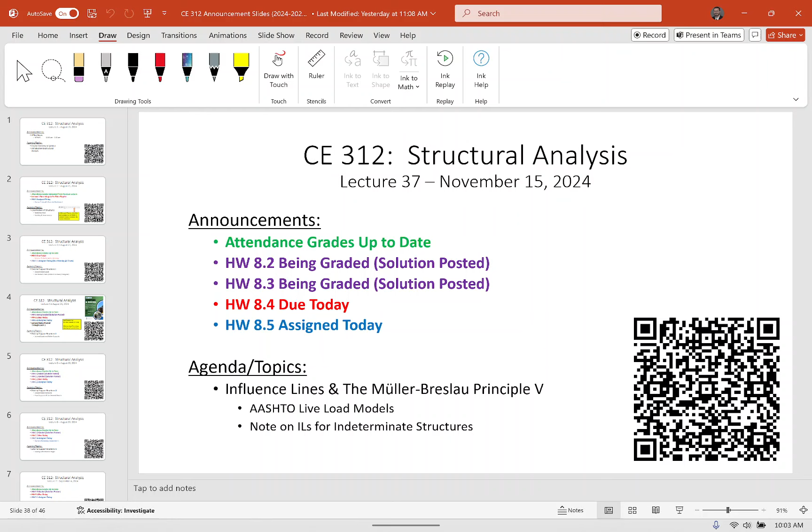Okay, so let's talk about our final lecture of influence lines, and what we're going to be talking about is AASHTO. How many of you have heard of that? I would imagine those of you who've had a transportation class have heard of AASHTO, the American Association of State Highway and Transportation Officials. I know I've got a couple mechanical engineers who probably are like, am I too mechanical to get that reference? So I'll explain. But let's just recap.

So we are still using the Mueller-Breslau principle to construct influence lines. And today, like last time, I am going to just give you the influence line. We are going to be doing a simply supported structure today, and so this is going to be our influence line. I haven't put any numbers on this, and I did that for a reason.

They give me so many of these rolling chairs. Get that out of the way.

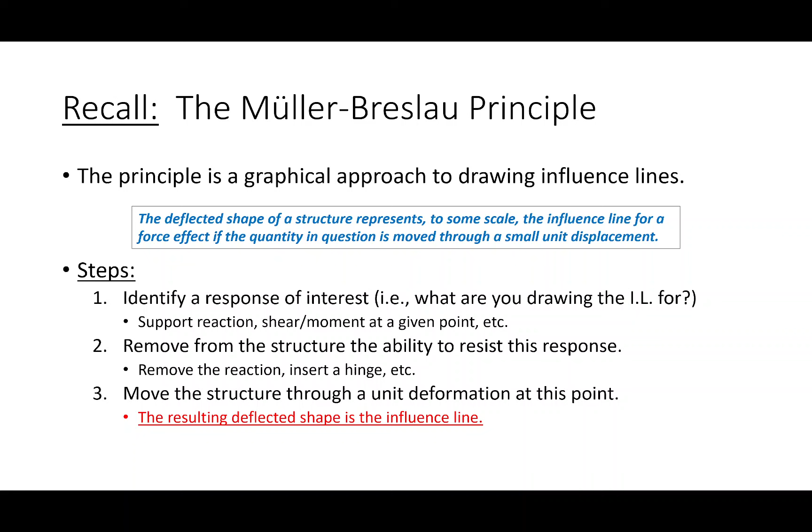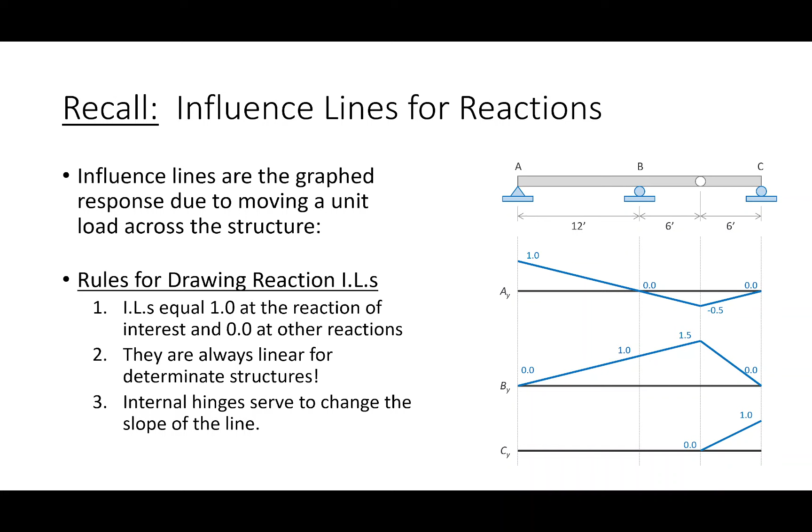Okay. So I didn't put any values on this influence line for a very specific reason, and you're going to see why in a bit. I do want to make sure that we're clear about the rules regarding influence lines. Influence lines are going to equal 1 at the support of interest. They're going to equal 0 at all other reactions. They're going to be linear for statically determinate structures. And for internal shears and moments, the big thing I want to get across is that influence lines are going to be 0 at the supports.

So the problem we're going to do today is an influence line for a bridge, and we're going to say it's a simply supported bridge, 80 foot long. Ultimately we're going to try to record a series of responses at points of interest, and the goal is to develop a big old table of these responses. I have here on the board a table that we're going to generate for the shears, and then we could generate a similar one for the moments.

Remember how I said we would do this at every tenth point, right? So if we had a bridge that was 80 foot long, we would generate a series of responses at x equals 0, and then x equals, there it is. We would generate a series of responses at x equals 0, and then we would do x equals 8.

x equals 16, all the way to 80. Now, if we're talking about internal moment, we're going to have essentially zeros right here and zeros right here. For shears, what we would have are the reactions.

What we're going to do today is we're going to pick a particular point on this table. So we're going to pick 37.5. And so we're going to generate a value here, a value here, a value here, etc. across the table. And we're only going to do it at one point, and then you're going to see what the answer would look like if you did it at every point. And that's where software and whatnot comes into play. But we'll get to that here in a bit.

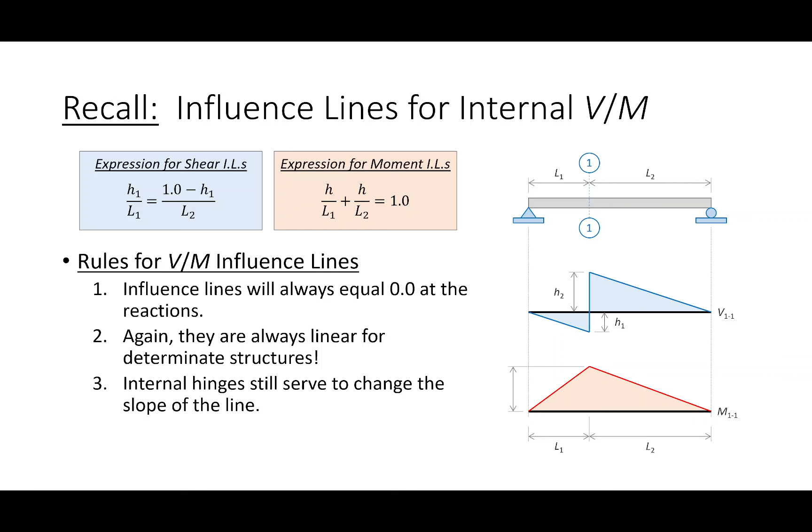Okay, let's talk about bridges. It is obvious that we need to design bridges for vehicular loads. They have to be strong enough to support the loads that they're going to be subjected to. But we don't design bridges for Honda Civics, okay? I'm being facetious when I say this, but really if you're a bridge engineer designing a bridge, the phrase I like to use is the cars are free. In other words, the cars do not produce appreciable load response on a highway bridge. It's the trucks that we need to worry about.

And really the term that I want to use is what are called exclusion vehicles, okay? Exclusion vehicles are your statistically upper bound loadings that you would need to consider. So things like concrete mixers, short haul vehicles, things like that. Now, we as engineers could not by any means design a bridge for every single truck that ever would cross a highway bridge in the United States. We can't do that, okay?

So what do we do? Well, by we I mean the engineering community. What we in the engineering community do is we collect data across highway bridges in the United States. If you ever hear the term weigh-in motion study, this is what I'm talking about, where we collect the weights that bridges are experiencing. And what we do is we develop a load model. And that load model represents, as best as we can, whenever you make the model simple, you sacrifice some accuracy, so there's a trade-off.

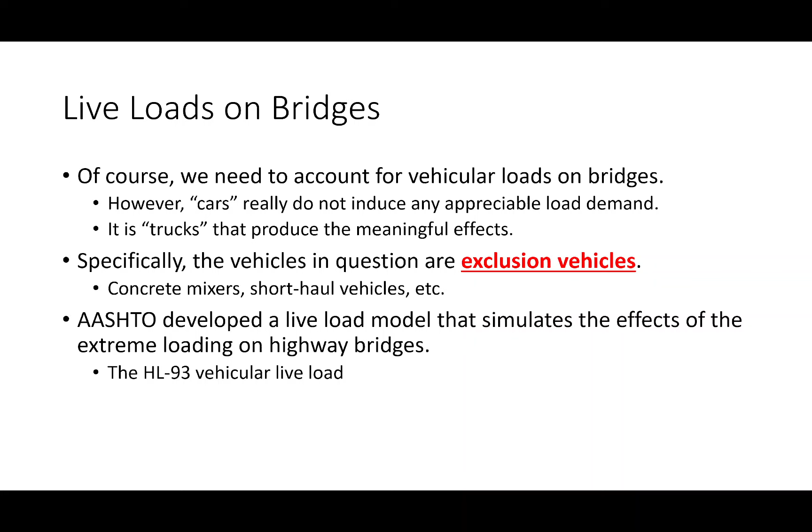So the load model that we use consists of three components. It consists of a design truck, a design tandem, and a design lane load. So let me take each of these one at a time. The design truck is what we see here. It consists of three axles. The front axle weighs 8 kips. So if I were to draw this as point loads, I would have an 8 kip load, a 32 kip load, and then a 32 kip load right here. So this axle weighs 8 kips. These two axles weigh 32 kips.

Okay, so let's make sure we're paying attention. Let's take the front axle. If the front axle weighs 8 kips, how much force is each wheel putting down on the front axle? 4 kips, right? 4 kips here, 4 kips here. And the wheels are spaced 6 feet apart. So if you wanted a 3D view of the truck, it would be 4, 4, and then 16, 16, and then 16, 16. And so the truck would look like that, if that makes any sense.

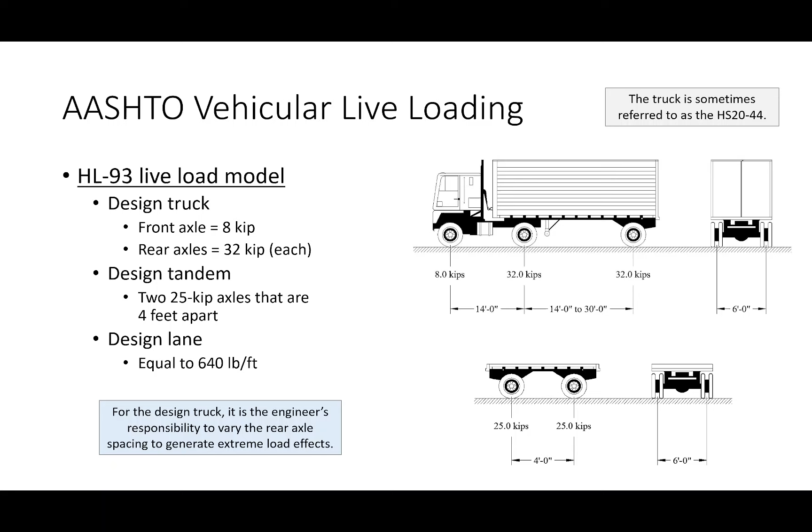So what you would need to do as an engineer is deal with all three of them. You would need to get a series of responses for the lane, a series of responses for the tandem, and then a series of responses for the truck. You would then combine them with these statistically calibrated load combinations and use that combined load, and that's what you would design with. That part is really easy. If you have this data and this data and this data, combining them takes about 5 seconds. The hard part is getting the data. And so that's what I want to go through today. Does that make sense? Okay.

Now, what we're going to do is apply the AASHTO load models to a bridge that's 80 foot long, and I want to get the data. I said 37.5. I'm sorry, I didn't mean 37.5. I meant 30. I know why I said 37.5, and you'll see why. But we're going to do this envelope, and I want to get the data in this row for x equals 30 feet. I said 37.5 because I was using that number there, so bear with me.

All right, so one of the things that's worth mentioning is I've already given you the influence lines. I think for a problem like this, constructing the influence lines is pretty easy. I hope everybody's okay with that. So I'm giving you the influence lines, and I want to figure out the worst case shears and moments due to my three loads. Worst case positive and negative shear for each, and then positive and negative moment for each, at 30 feet. And again, that would just be one row in the table, and then we would do this over and over again.

Let's see. Okay, so let's see what we can see. Where did my pen go? Where did my little pen? Oh, there it is. Okay. So

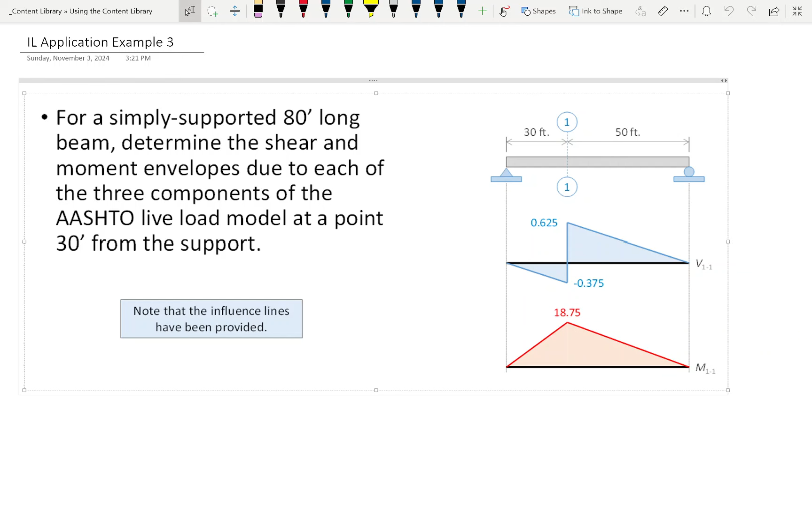I'm actually going to do this in the backwards order that I described it. I described the truck, the tandem, and the lane. What I'm going to do is do it in the order of the lane, the tandem, and the truck, because I think it gets harder as you go. So just bear with me. Let's see what we can figure out. Okay. I am going to cheat a little bit here. Bear with me. I'm going to cheat a little bit.

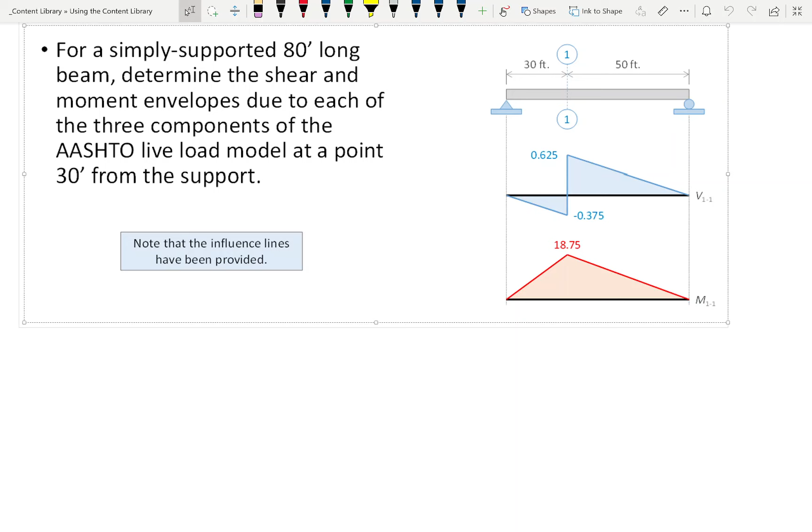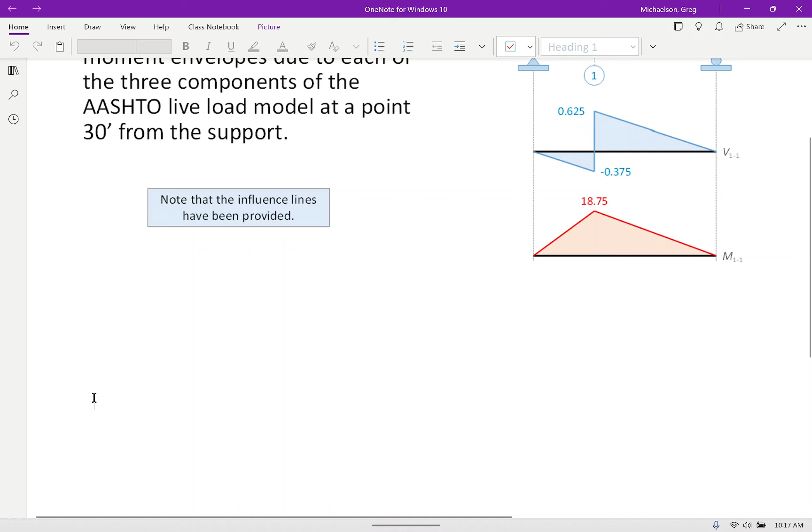Are you kidding me? Why does this always happen? Let's try something here. If this doesn't work, I'm going to get upset. Okay, for some reason, OneNote likes that, but it doesn't like the other one.

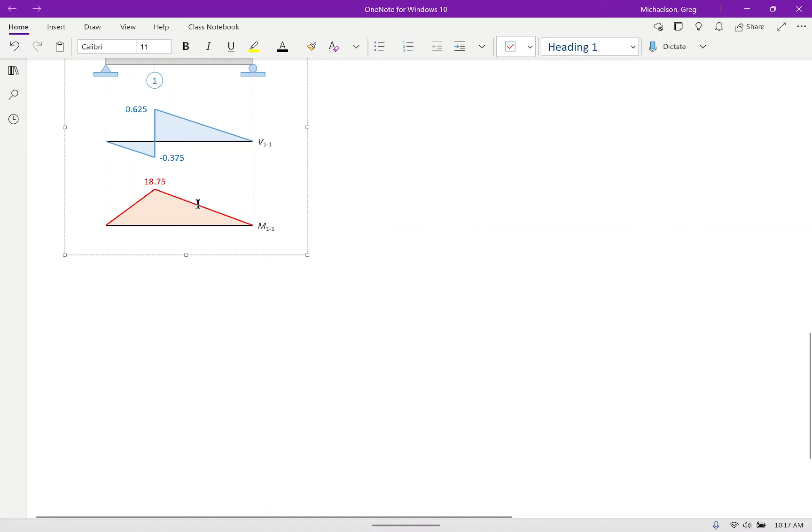Okay, so if you notice what I'm doing, I'm kind of being a little lazy here, and I'm pasting these images over and over again, mainly because I don't want to have to scroll up and down again. If you're writing this in your notebook, it shouldn't be that big of a deal.

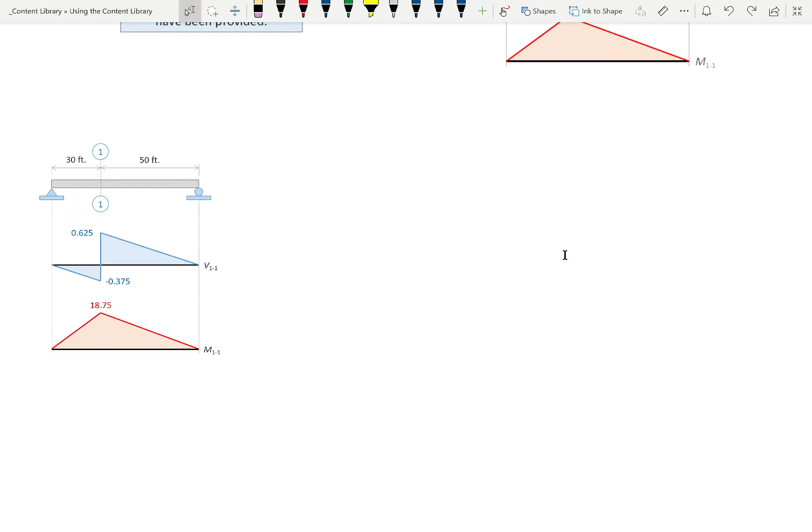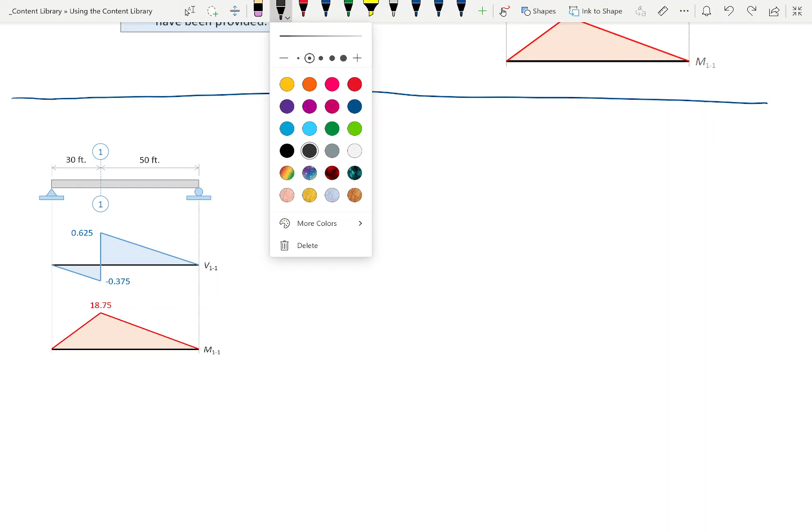Okay, so what we're going to do is we're going to handle each load one at a time. Let's start off with our lane load. The lane load is admittedly the easiest one to deal with. So our design lane is 640 pounds per foot. And so we're going to place that lane load wherever we need to generate worst case response. So we've done this before.

If we were looking at shear, where would we place the load to generate worst case positive shear? We'd place it from here to here, right? What about negative shear? Here to here, right? What about worst case positive moment? Everywhere. What about worst case negative moment? Nowhere, right? There is nowhere that you can place the lane load to make the beam frown at you. Make sense? I just want you to keep that in the back of your head.

Now, a couple things worth mentioning. I'm going to do some intermediate calculations for you because I don't want this to be an exercise in geometry. Would you believe me if I told you that that area is 15.625? And that this area is negative 5.625? Would you also believe me if I told you that that area is 750? We have 18.75 times 80 over 2, so 18.75 times 40, right? Does everybody believe me there?

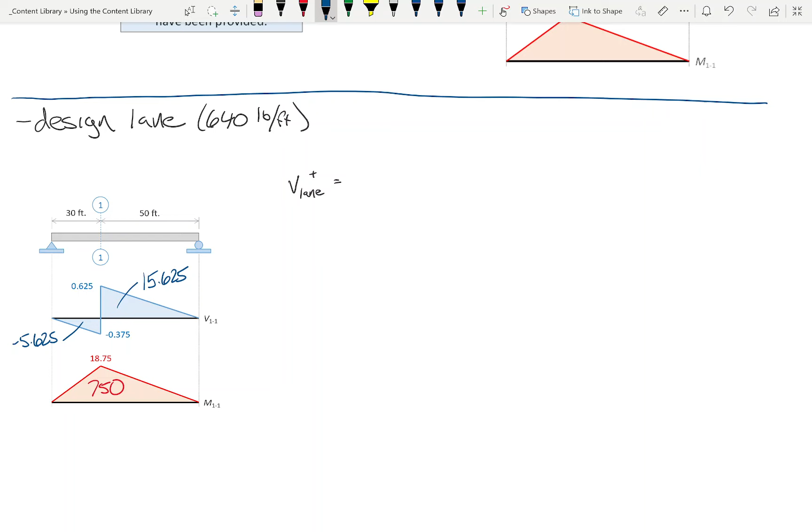Okay, so for the worst case positive lane load, first off, note that 640 pounds per foot is 0.64 kips per foot. So 0.64 kips per foot times 15.625 feet, and it's actually pretty even. It's 10 kips, and then V lane minus is 0.64 kips per foot times negative 5.625 feet, and that ends up being minus 36 kips.

So under the lane load, this point on the beam would see a range of shear anywhere between 10 kips and negative 36 kips. Wait, did I get that backwards? 3.6. Sorry. 3.6. That was a very understandable questioning look from the class. Hold on, Dr. Mike. There's this thing called arithmetic. That's a fair point.

So similarly for the lane load, for the moment, we're going to have a positive, 0.64 times 750. And again, for you units folks, that's 750 square feet. That's 480. And then what did we say the negative is going to be? 0.

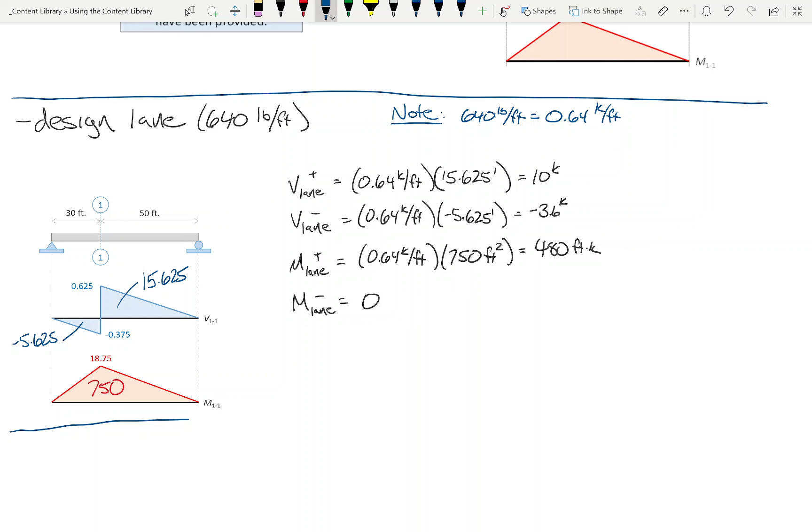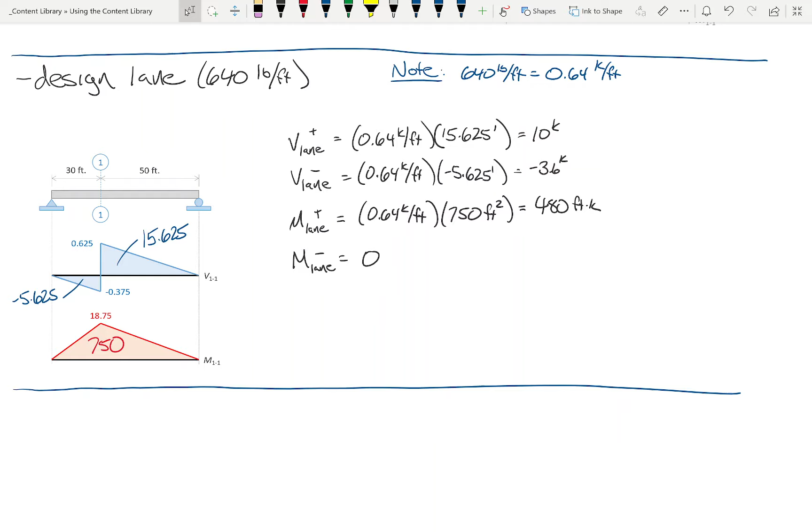So what I have here on the board is just for shears. I would say that this value here is positive 10, this is negative 3.6. You're probably not seeing where this is going, but give me a little bit of rope on this one. You'll see where this is going in a bit. Is everybody okay with this? No questions. Then I'm going to start ratcheting it up a little bit with the design tandem.

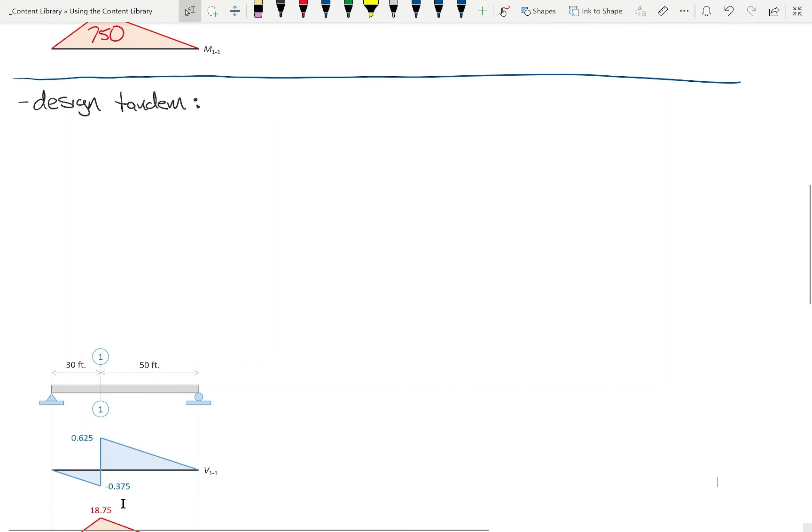So let me bring this up here. Now, remember, what does the design tandem look like? Here's the ground.

That's what the design tandem looks like, right? Okay. So let me see if I can paint the picture. I have a design tandem. So I want you to imagine that I have two loads that are 25 kips each, right? The distance between them is fixed at 4 feet apart. So let's look at my little diagram here on the board.

I need to figure out where to put these loads on the bridge in order to generate the worst case response. So let's start with positive shear. So we agree that this is going to be my positive area. This is going to be my negative area, right? So is everybody in agreement that if I want to generate worst case positive shear, I don't take those loads and stick them here, right? Everybody okay with that?

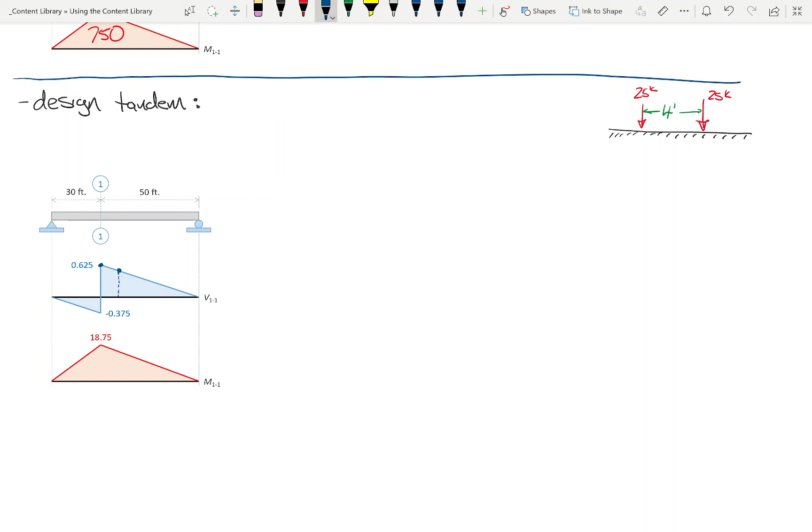So I know this value here is 0.625. I need to figure out this value right here. We'll call it H1. So how do we do that? 0.625 is to 50 as H1 is to what? 46. Because if that is 4 feet, and that is the tiniest number I think I've drawn this entire semester, but if that's 4 feet, that makes this 46, right? Does that make sense?

So, therefore, this implies that, here, I'll lower this down just a bit. And what is that? 0.575. Is that okay? All right. Now we're not talking about negative shear right now, but can anybody... So we did this one. We did this interpolation right here.

We're not talking about negative shear right now, but can anybody peer through the crystal ball and see another interpolation we're going to have to do? We're going to have to do this one, right? So why don't we go ahead and recognize that we're going to need to do negative 0.375 is to 30 as H2 is to what? If this is H2, 26.

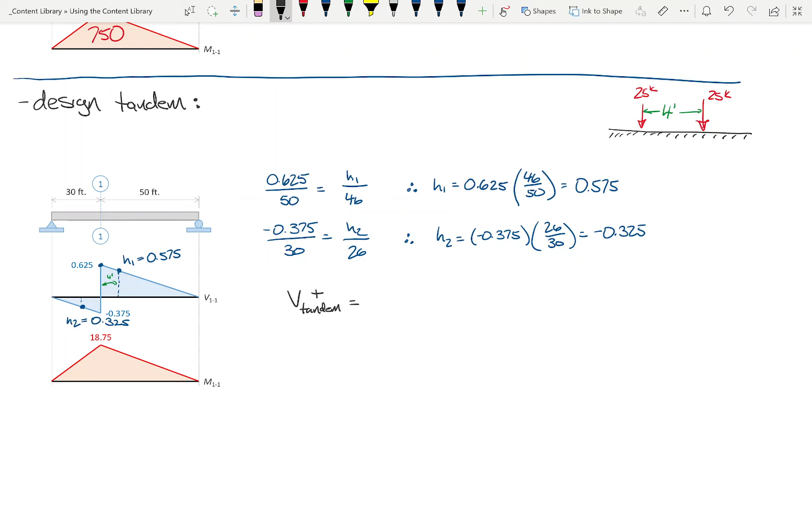4 kips times 0.625. 4 kips? Oh, 25 kips. All right, so 25 times this plus 25 times that, right? Does that make sense? So this is going to be... does that make sense? And what is that going to be? 30.

I picked a spacing where I wanted the numbers to be kind of easy to deal with. So V tandem negative, I'll go ahead and do this one for you. Would you agree with me if I said that? So we'll say that.

Sound good? Okay. Now, let's think a little bit about the moment. I did my best here on the board to try and draw this to scale. It's perfect on the screen. I have 25 kips. Where is one of those 25 kips going to go? Right here, right? Okay. Where's the other one going to go?

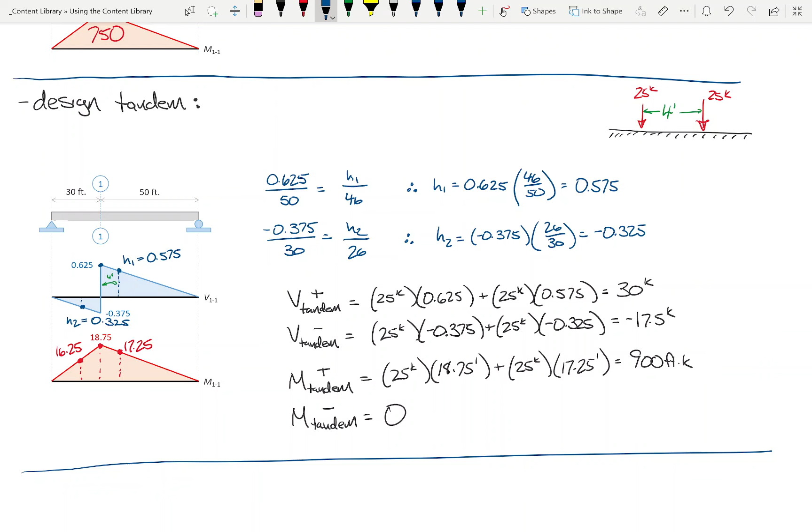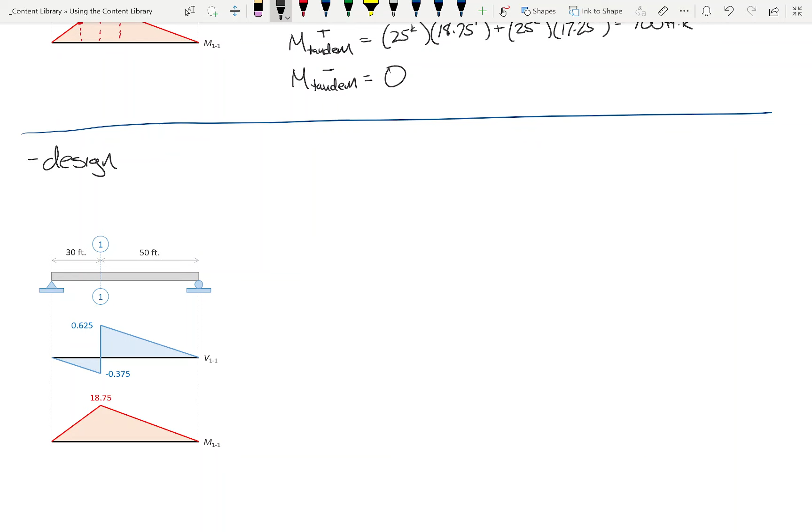All right, let's talk about the truck now. Okay? Let's talk about the truck. So the truck, see, now you can see why I cheated. Because I didn't want to have to scroll up and down. That would just be a nightmare. Okay. All right. So, again, what did we have? We said that the truck, 8 kips, 32 kips, 32 kips, 14 feet, and then we said 14 feet to 30 feet, right? That's the model.

Can I ask you a question about bridge design? Is there anything on that model that says the traffic's going this way? Well, that's how I drew it, but does it have to go that way? Like, what I'm getting at, is there anything that says the truck can't go the other way? Vehicles can drive either way on the road, right? The model doesn't care, okay? So what I'm saying is you can reverse the order. And you might be wondering, what's the point? What are you getting at? Okay. Do we agree 14 feet is the number that makes sense, not 30?

Okay. So here's what I'm going to do. On the shear diagram, let's do shear first. On the shear diagram, what I'm going to do is I'm going to interpolate 14 feet out, 14 feet out. And then over here, 14 feet out, 14 feet out. And I just realized I said shear diagram, not shear influence line. Bad. This is the influence line, not the shear diagram. Okay, so let's go 14 feet out either way.

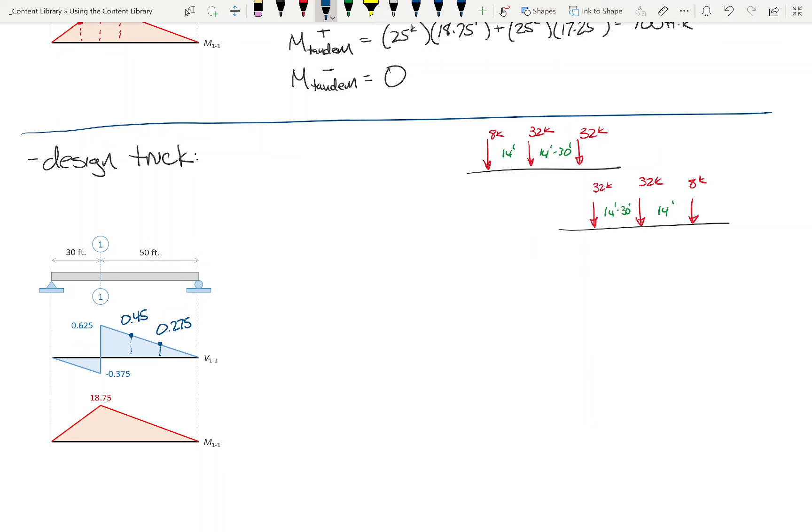Are you all comfortable if I just give you the values? So this is 0.45, 0.275. This over here, negative 0.2. And this, negative 0.025. And I can see a question coming up, which I'll address here in a bit. Well, I'll do it now. What happens if it goes off the bridge? Just ignore that axle, and you'll see what I mean here in a second. Okay.

All right, so let's do V truck positive. So we're going to have a load times 0.625 plus a load times 0.45 plus a load times 0.275. Okay. So what do I put here? Do I put 8, 32, and 32? No. I put 32, 32, and 8, right? I face the truck whichever way is going to generate the worst case response. And when you chug this out, you get 36.6 kips.

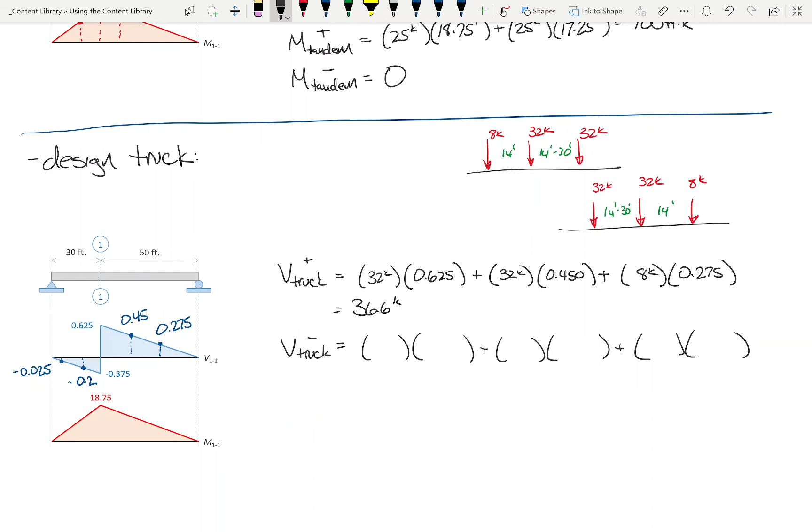For V truck negative, let's do the influence line indices first. So if I go, let's just say, from left to right. So bam, bam, bam. So negative 0.025, negative 0.2, negative 0.375. So what order do I place the loads? Is it 8, 32, 32? Yes, right? Because that's the worst case value. So 8, 32, 32. And so that is negative 18.6. So what would go in our final columns? It would be plus 36 and then minus 18.6.

Okay. Now, for moments, how do we do the moments? Like, how do we handle this? Here's how I do it: I don't try and be predictive. We agree 14's the distance, right? So let's just interpolate 14 foot on either end twice to see what values we should use, okay? Let's just go 14, 14, 14, 14. Is everybody kind of okay with that? So if you all are comfortable with this, this one ends up being 1.25. This is 10. This is 13.5. And this is 8.25.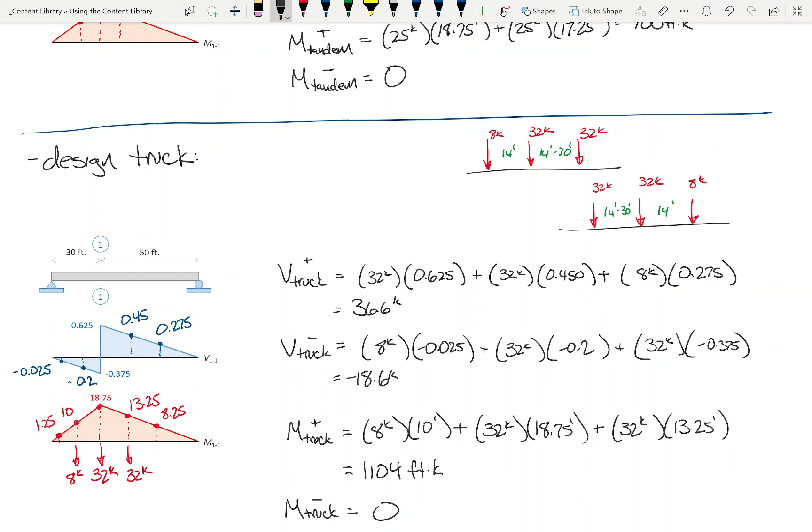Does that make sense? So this is the range of moments and the range of shears for which you would design. So if you want to know what the answer is, all these values. Okay? Does that make sense? Okay. Does everybody feel comfortable with this analysis?

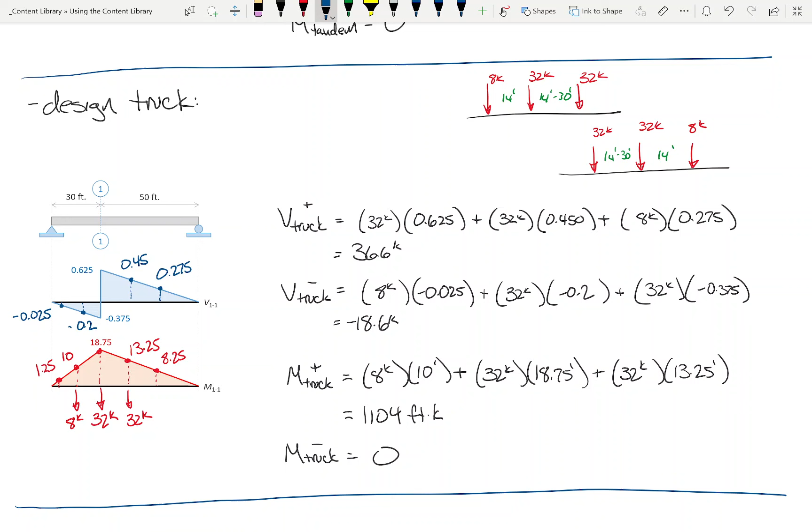So if you were to ask me what I call this process, sometimes I call it live load generation. That's kind of what I call it, is to generate the range of live loads for which we need to design. Make sense? All right, any questions? All right, I got a couple things I want to say, and then we'll call it. Okay. All right, so let me say a couple things.

So we did this at x equals 30 feet. Now, I picked an arbitrary point, and some of you are probably thinking, well, wait a minute, Dr. Mike. You said 10th points. 0, 8, 16, 24, 32. 30's not on that list, right? You're right. It's not. Okay, so let's talk about that. Engineers. So first off, would everybody agree that you're going to have to do this a lot?

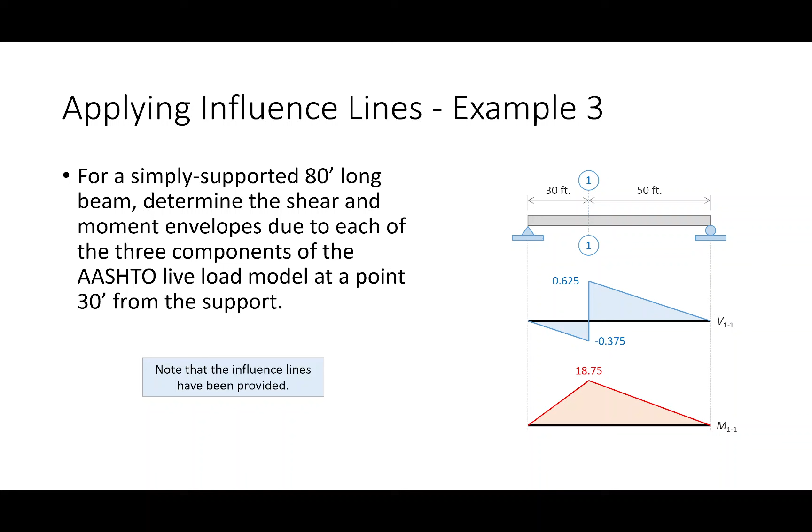So the first thing that's worth mentioning is that I didn't give you any values here because I think a valuable exercise is to figure out how to draw an influence line at some distance x away as opposed to 30 feet or 40 feet or 45 feet away. Do it at x away. And you can derive pretty simple formulas for this: this is negative x over L. This is 1 minus x over L. This point right here is going to be x times 1 minus x over L.

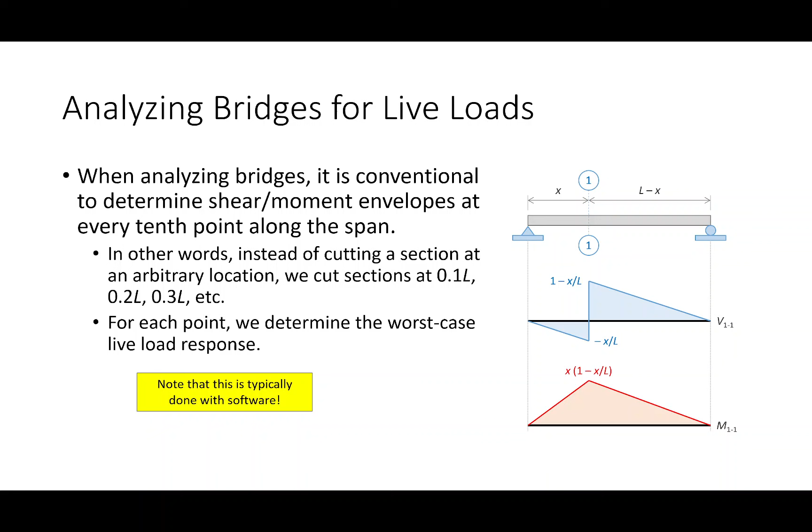So let me give you a motivating example. Let's say you needed to determine the shears and moments 30 foot away from the support, because right there you have a connection, a splice plate, or a cross frame, and you need to know the forces at that point to design and detail it, which is very common in bridge design. So one way of doing that problem is to do this. If you do this at 30 feet, these are the answers for shear. But couldn't you get close enough to these answers by just linearly interpolating?

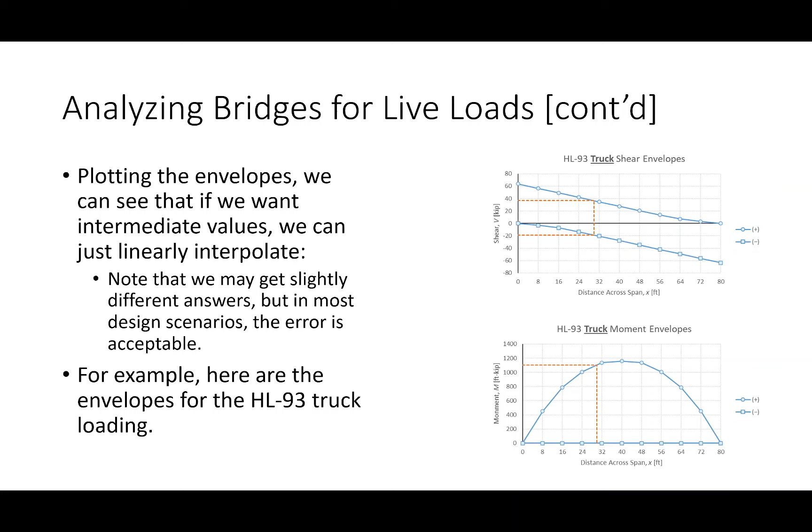Now I'm going to show you my next slide. I think it's the most dangerous slide I'm going to show you this whole semester, and I want to explain why. Everything that we have been doing has been influence lines for determinate structures. What if the structure is indeterminate? If the structure is indeterminate, the influence line can curve.

Because if I take, let's take the best example, the influence line for the reaction at B. So how do I draw the influence line? I take that structure and I kick out the roller support from B, and then I move point B through a unit displacement. But if I remove the support at B, that's a simply supported beam. So in order to pick point B up, I have to deform the structure, right? So it's gonna curve, okay?

But the reason why I say this is a really dangerous slide is this is only for structures that are indeterminate, okay? So if I give you an exam problem, for example, and it's a determinate structure, don't do that. Don't do that, okay? Does that make sense? I'll just level with you. I'm not giving you an indeterminate problem where you need to develop quantitative influence lines on the exam. I'm not doing it. So, no.

Now, in the real world, if you had a two-span bridge that was a continuous span, you're going to have some curved influence lines. That's where software comes into play. That's where MASTAN would do this or something like that. You would just develop a finite element model and then do it at every 10th point and record your responses. Most bridge engineering software programs will do that for you.

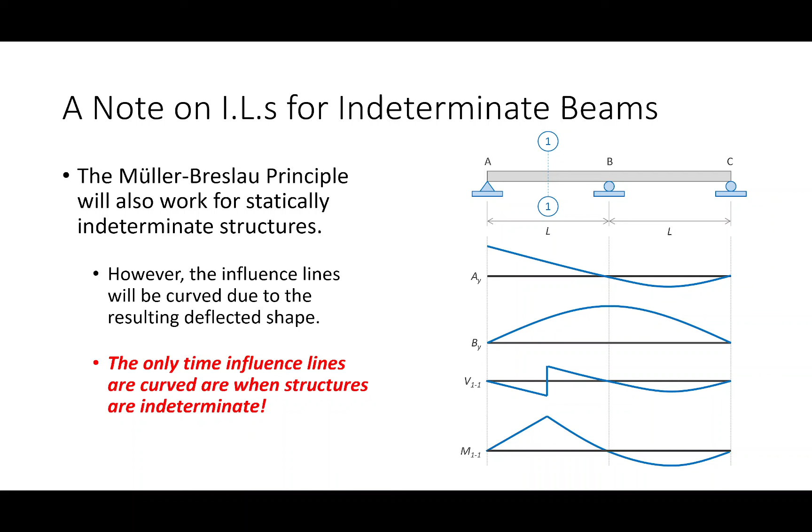All right. This is it for influence lines. I have one homework for you. But next week, we begin our last topic in this class, which is what's called matrix analysis. So I'll say a couple things about matrix analysis and then I'll let you go.

If you open up your textbook, it has a bunch of different ways to compute deflections. There's geometric methods, energy methods, conjugate beam, Castigliano's method, direct integration, all this stuff. I only showed you one: virtual work. And the reason I showed you virtual work is it's the one method that will work for any problem. There are some methods that work better, but this works for any problem, anytime. That's why I like it.

If you open your textbook, there are multiple ways to analyze an indeterminate structure. That's something we haven't actually talked about in here. We have not done any problem like that. If I'm going to show you one method, which one? The answer is, I'm going to show you what MASTAN does, or more specifically, what any structural analysis software program does.